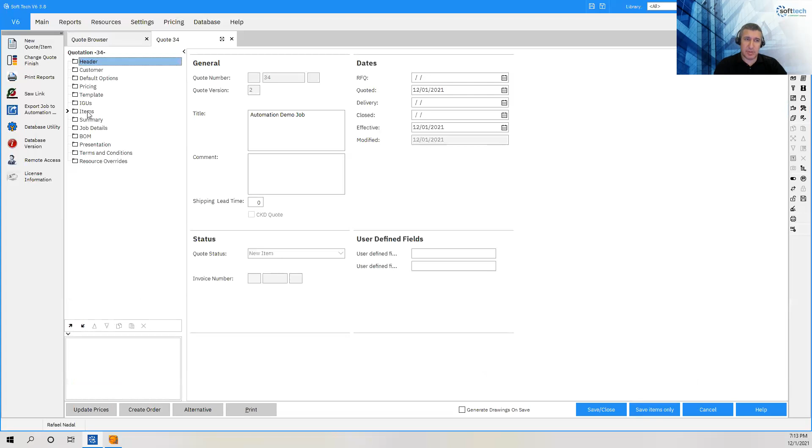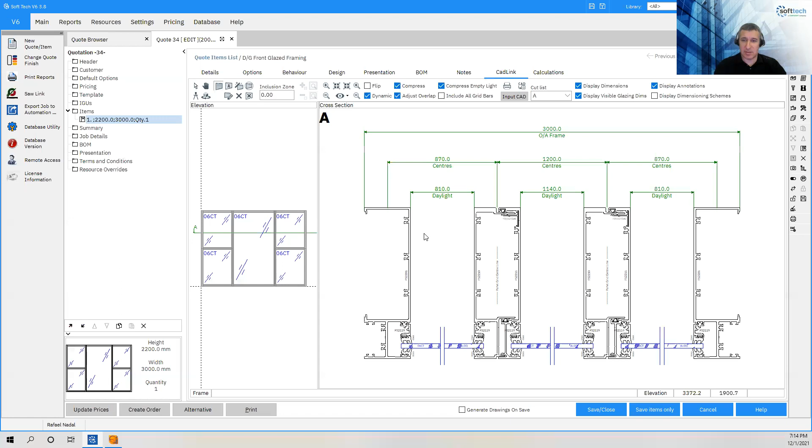And this is a simple storefront, with one elevation only to keep it simple. This is my elevation. I will come back later on to show you how I will build that elevation quickly as part of the process, but right now just know that this is my elevation. And this is how the system looks here.

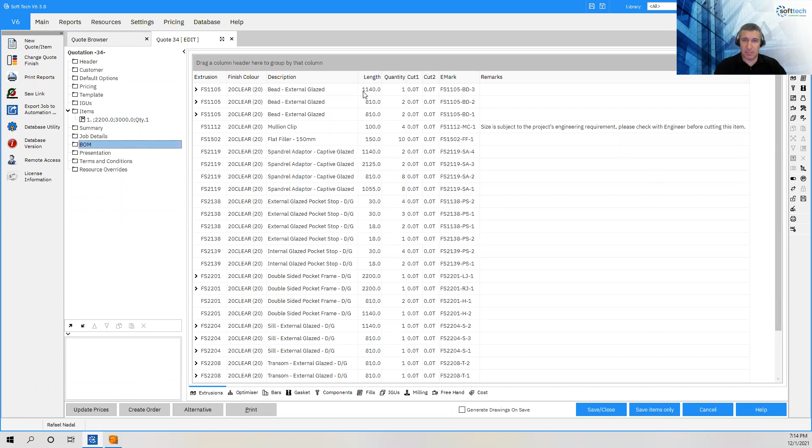It's a simple storefront with a double glazing. So for this job, having only one item in the bill of material, if I go here I can see a list of all the extrusions, hardware and other components. Since we will do the saw output, I'm focusing on the bill of material right now for the extrusion. You can see it's already been optimized. We have the 6.5 meter as a standard stock length, and these are the bars.

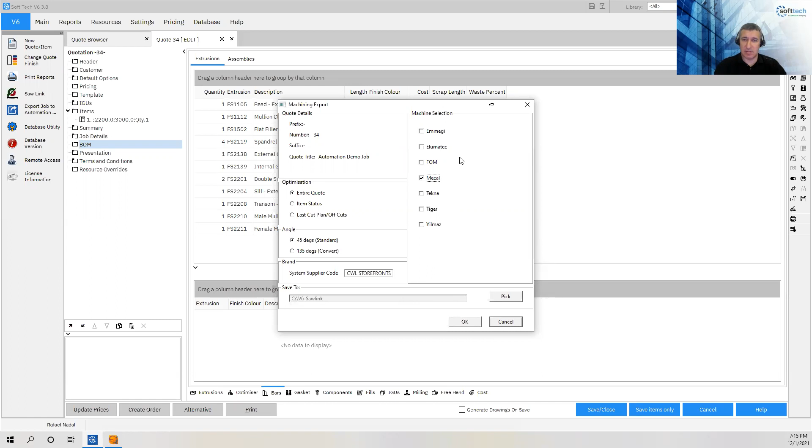So I click this button here for the saw link and pick the job. You can see some machines here being picked, and we can increase that list if needed, but I'll just pick the Mecal, and this is the path that it will save the machining file. I click OK. It's sending the optimization information data to the machine, creating the file to send to the machine.

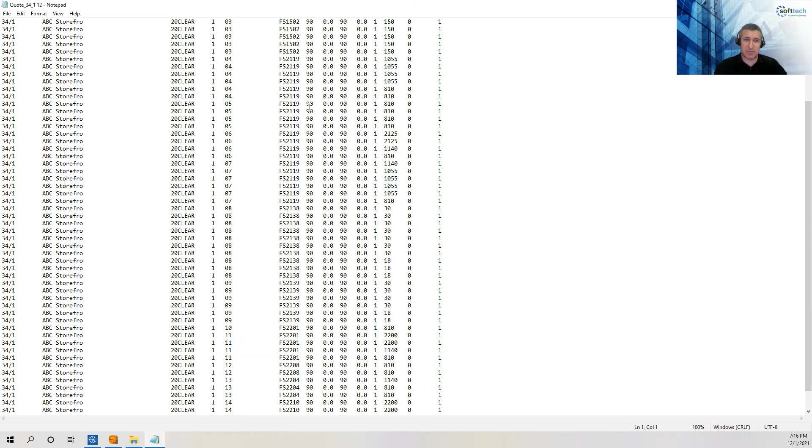And you can see here, that's the data exactly. Now I created this one. I double click, and this is the format needed for that particular saw machine. If I click to some other, it can be a completely different format, looking almost opposite of this, because all the different saw machines will need a different format. So if something is not listed, we can quickly add that in the list and make another option for our customers for future work. That's how we will send the machining, the cutting information, to the saw machine.

Again, we can easily create a cutting list as well, with the bars and how you optimize and cut them. If you would do that, it's a different type of automation - we create the paperwork for you that you can proceed with, facilitating the shop floor work. But ideally, we could just send that full optimization without any paperwork, create the file, and send it to the saw machine. So this is what I showed right now.

And similarly, that same job we can also send to the automation module. So I click this button this time.

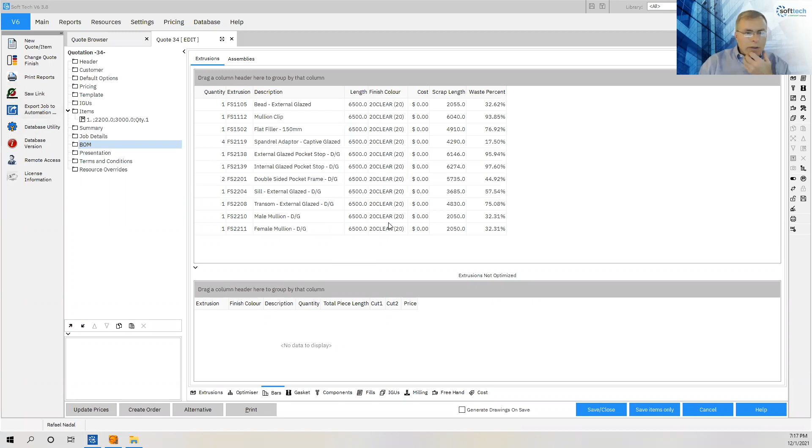One thing I want to make sure we don't miss: when we talk about things like the automation module and saw link, what we're talking about are development tools built to connect the data in your database to your shop floor. Because we don't mention or show something doesn't mean it can't be done. Most of our customers have a custom database. V6 is known in the industry for being a very customizable platform, and we can do the same thing with automation. So for instance, if you come to us and say you watched our webinar recording and saw that your saw manufacturer wasn't included in that saw link, that you couldn't check a box to select your brand of saw - that's not an issue. We can develop a post processor that will output to that saw.

Or maybe it's not a saw, maybe it's a different type of equipment, like a crimper I mentioned earlier. As long as we can work with the manufacturer of that piece of equipment, we can develop an exchange with that equipment in order to drive it. What Murat just showed was an existing tool we have to drive specifically saws. He's now moving on to our tool for driving CNC milling machines. I'll hand it back to you, Murat.

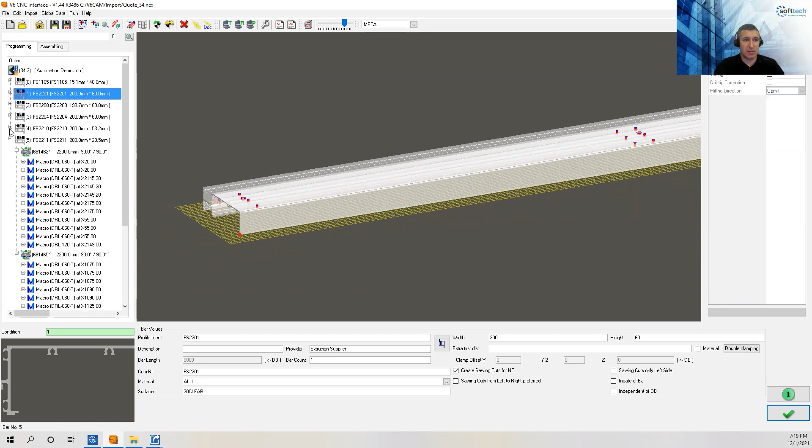So I click this button, and then I say open in automation module. Okay, so then it will just open the module. So you can see this is our job being exported. And if I click each and every profile here, you can see for each profile the bar length - that's 6 meters on this one.

And 6.5 meters was the setup, I think, for some other. So when I zoom to one of them, you can see all the millings.

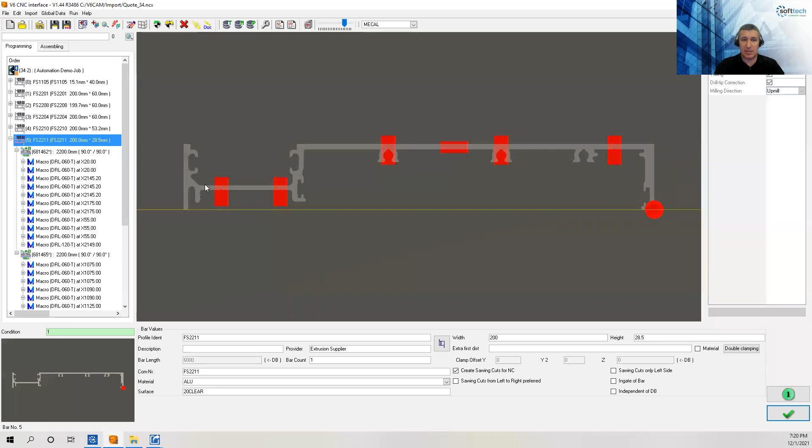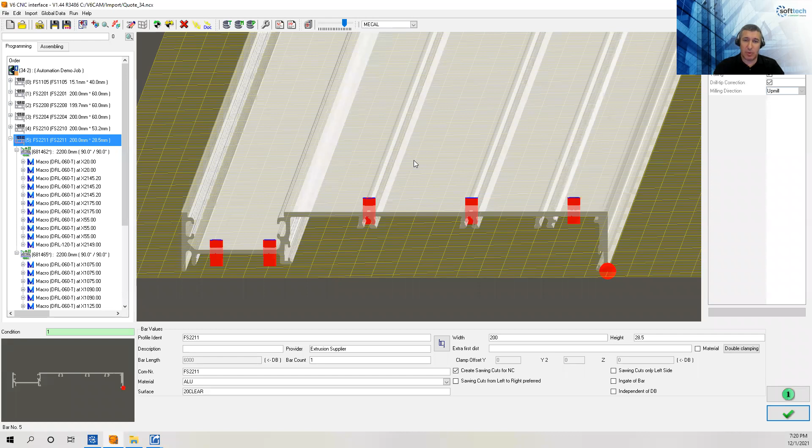The way the system works, since we already set up all those points where the reference points will be for machining, and associate them with what we call macros, the system knows the same product, the same type of frame being exported to the automation module, it automatically puts the correct milling and figures out what type of machining will be there, whether it's a slot or some other operation, a drill. So you can see all those drills being automatically created.

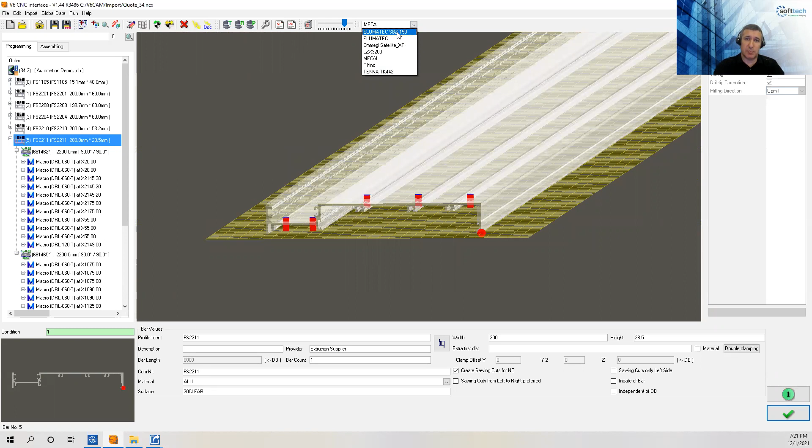So what we do next, you can see here, there are a list of machines. So I want to pick this machine. This is a 5-axis, which will also do the cut for the bars.

And what I will do, I will just do the tool assignment here. So I click this button.

Murat's actually getting into more detail than a typical automation process would involve. He's explaining a little bit about what's happening behind the scenes to make this possible. If given no need for modification to the work, once it's sent from V6 to the automation module, then it really is a click-through process.

What he's showing is the fact that in this process, there's an opportunity for anyone in production management, all the way down to the person supervising the machine, to review this process and check it for quality reasons, and to manipulate it if necessary for quality or other reasons.

But ultimately, assuming that a job is ready to be sent to the machine and the machine is ready to receive the job, it is truly a click-through process, and that can even be automated. I've worked with clients that automate this process that's being shown here. It happens behind the scene, based on a barcode scan, for instance.

So we can get a little bit into the weeds, and we're going to intentionally do that when Murat gets through this phase of his demo. But I just wanted to point out that much of this is background. The process in its ideal state is a very simple one. Back to you, Murat. Thank you, Kyle.

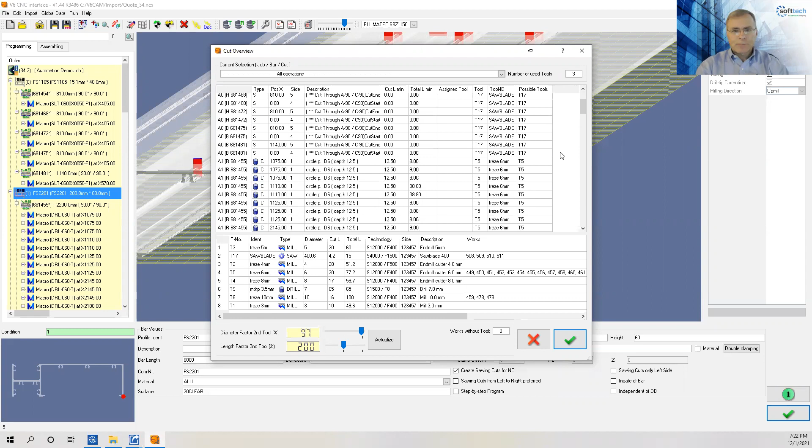So you can see all the tool assignments done here. And in work without tool, the quantity is 0. That means all the assignments are done properly and there is no warning. So I can just confirm. I'm not doing any change.

It will just prepare all the clamping positions, optimize, and create the optimized simulation. So let's see, it will come quickly.

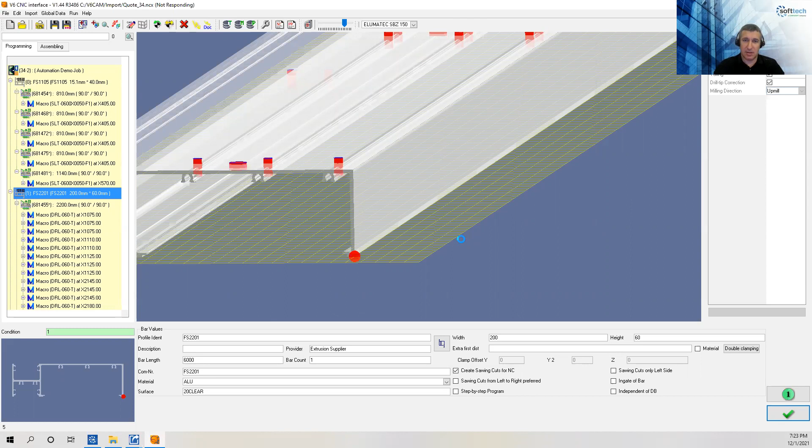And once we receive that, you can see that's there with the order like this. This is how the machine will operate throughout the different profiles.

And if I want to generate the NC file, I click this button and it's done. So right now I have the file being generated. So I can go here and open this, show you.

So you can see how an export looks like. And this export can be different format and completely different file type based on the machine. This is the file your machine sees.

Everything we've shown up to this point is part of Softech's automation module. This file goes to your Elumatec, goes to your Emmegi, goes to your MECAL, goes to your FOM, whichever brand of machine you have. We have a post processor that delivers the information that machine needs. The software that's proprietary to that machine reads this information and then takes over from that point to control your machines.

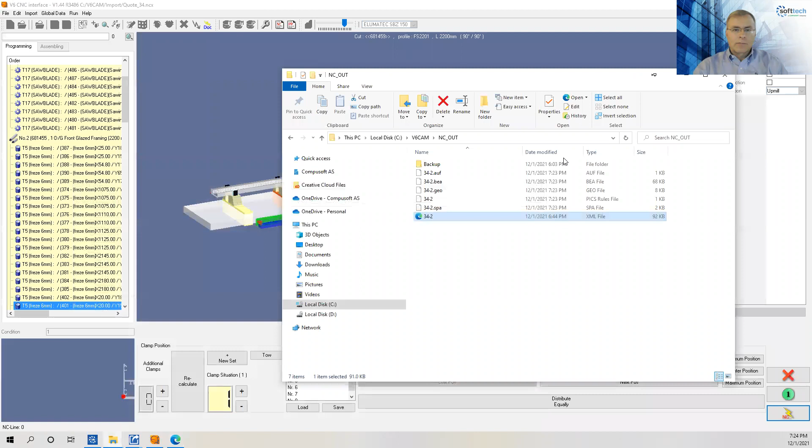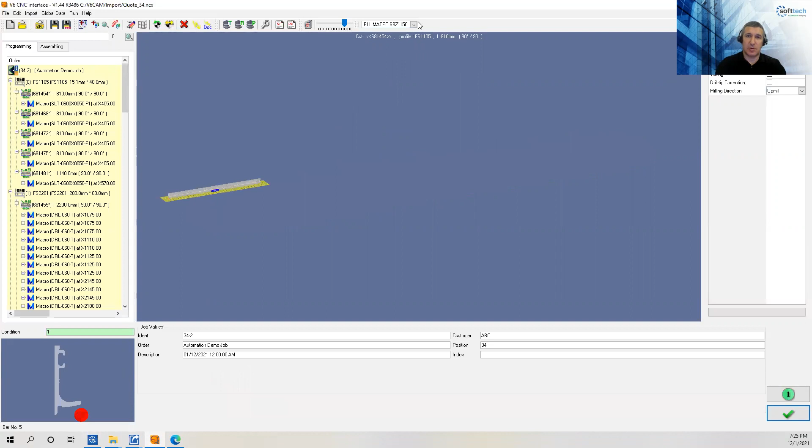So that's the process. Murat, can you click the drop down for the machine? Sure, again. So you can see, yeah, this is just a selection of different machines we put together for this presentation.

A typical shop, in my experience, you'll have one or two brands of machines and numerous models of those machines. So you might see in your shop, if you're in an Elumatec shop, you'll see SBZ 140, SBZ 151, SBZ 628, SBZ 122. If you're an Emmegi shop, you'll see Phantomatic, you'll see Comet, you'll see Satellite, you'll see Quadra.

So that's the purpose of this, the ability to send to whichever machine you choose on your shop floor the work that's to be done.

And it's flexible. We all know this never happens, you never have a machine go down, but it's handy in that circumstance. You might send to a machine, get partially through the work to be done, and that machine for some reason has a problem. You can go back into here, select a different machine, and post to that machine. So there's a lot of flexibility and controllability in this as well.

Is there any questions at this point?

Other than Paul's question, will it export G-code? Let me expand on that. Yes is the direct answer, but more importantly, it will export whatever data the machine manufacturer software needs. The only thing that will stop us from communicating with a certain machine is if that machine's builder won't work with us, which we've never experienced.

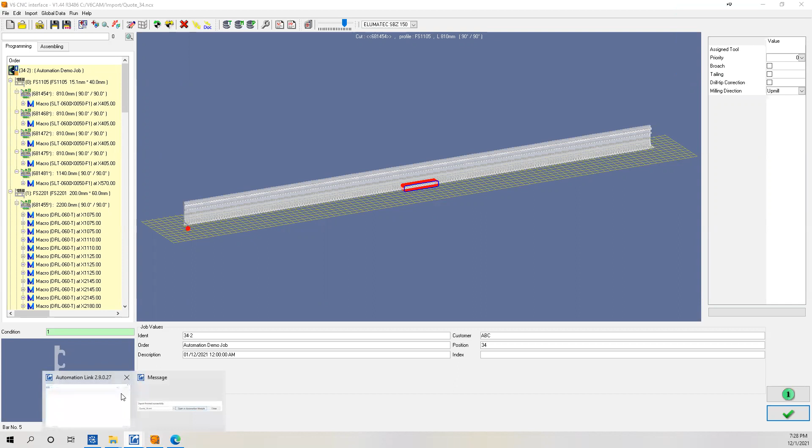Well, hold on, Murat. Expand into milling type, because I think that's important. Meaning, you could group things by—if you're doing just the strike side of a door leaf, you can do all of those first, right? By that specific milling type. I think that's important. Yes.

Yeah, so here you can see in this database the basic milling types being created. Those types can be as granular as you want, very specific to the machining, and accordingly you would have the option to send them or not.

And not only for that, you can also exclude some of the extrusions if needed, and it will list all the extrusions that we are sending. You can see, and we can exclude some of them from that export if needed.

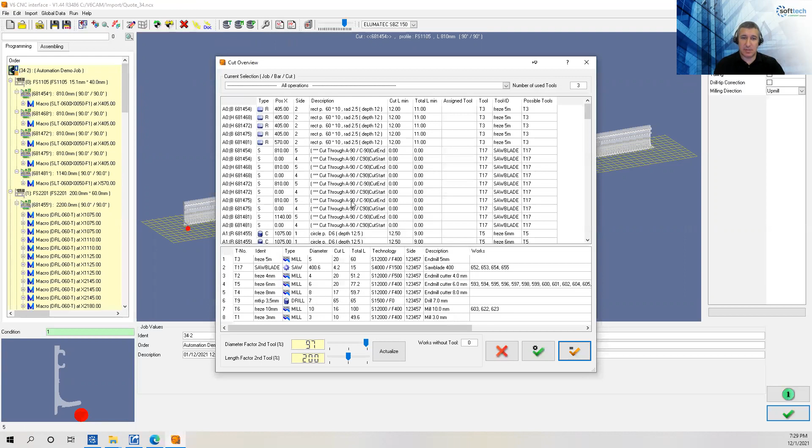And if I go back to this—I'll let you finish, Murat. Sure. And in this particular machine, the Elumatec, it's creating—

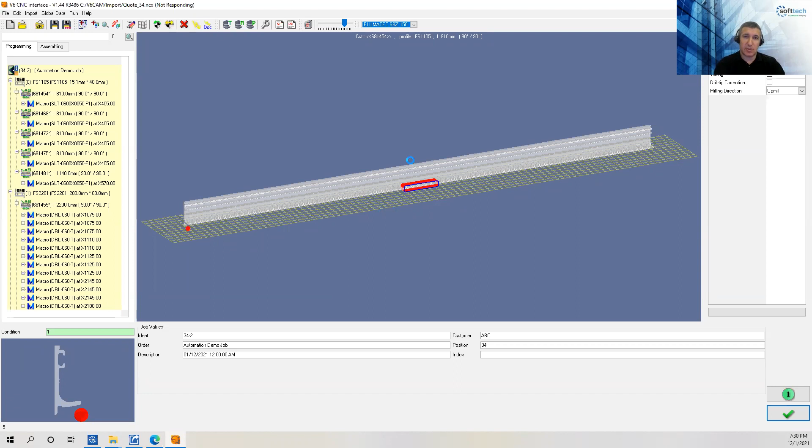Not only the milling part, it's also doing the saw part. It's a 5-axis, so once it's done, I will quickly go there. So in this particular example, you will put the full bar in the machine, and then the export will automatically adjust the clamps and then do the cutting and milling with the given order.

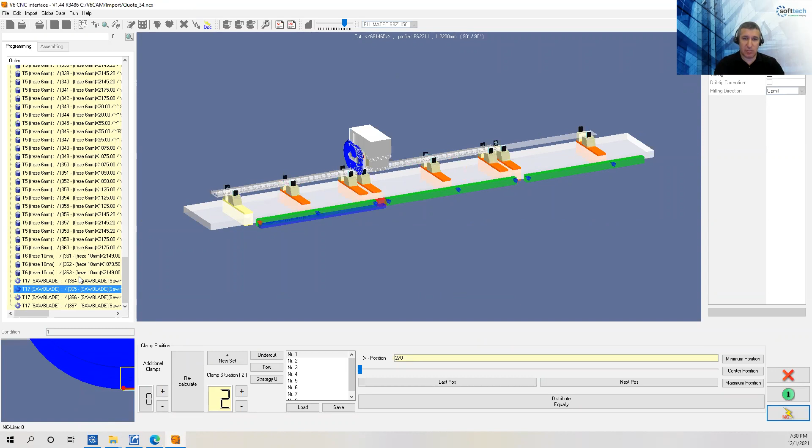So if I go to it, here you can see the saw blades part is done. Also at the middle, we have some saw blade stuff here.

So again, another option would be to send that to two different machines from the automation module. The bars for cutting go to the saw machine, and then once the cutting is done, the cut pieces are being machined in the CNC machine itself. So we have that option as well.

Yes, Kyle. Another interesting point that might relate to Paul's question a bit is—this happens frequently—you've sent information to the shop floor and started cutting and processing material, and then a change is made or an error is found that needs to be corrected. Some material has already been cut, but you need to re-optimize the entire project based on a correction or adjustment that's been made. We have the ability to track the material that's already been processed and identify what is usable and what is not, and retain that separately, so that in the re-optimization process we're not repeating work that's already been done. That might be somewhat relevant, especially in the real world.